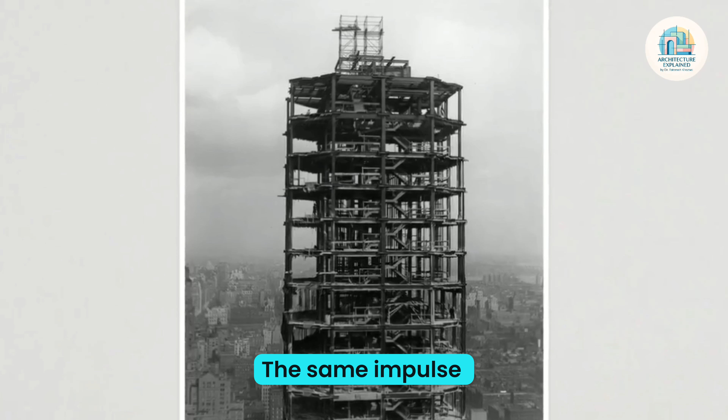Cubism rejected that rigid framework. By fracturing form and collapsing multiple, simultaneous viewpoints onto a single canvas, painters like Picasso proved that the traditional frame was a social construction rather than a physical necessity. This intellectual rejection of the fixed frame in art mirrored a physical crisis brewing in construction. The same impulse to dismantle traditional enclosures was moving from the canvas to the building site.

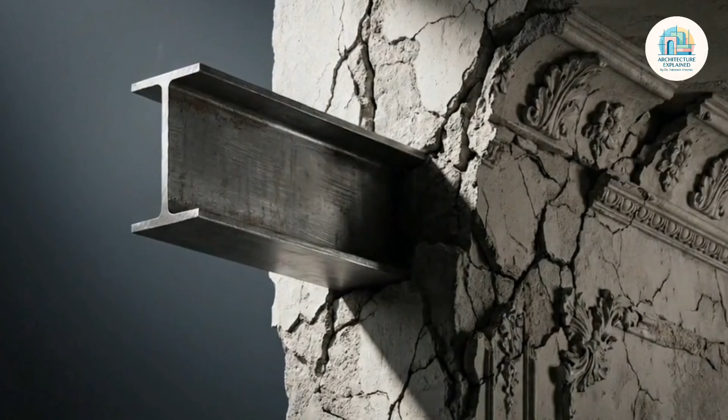The decision to strip away historical ornament wasn't just a change in taste, it was backed by a structural evolution. Architects were moving away from the massive, load-bearing masonry wall in favor of the localized efficiency of the point-load frame. In traditional masonry, height and stability are achieved through sheer mass. For a building to stand, its walls must be thick and continuous to carry the heavy downward compression of the roof. Gravity transfers the crushing weight of the structure directly through the exterior walls.

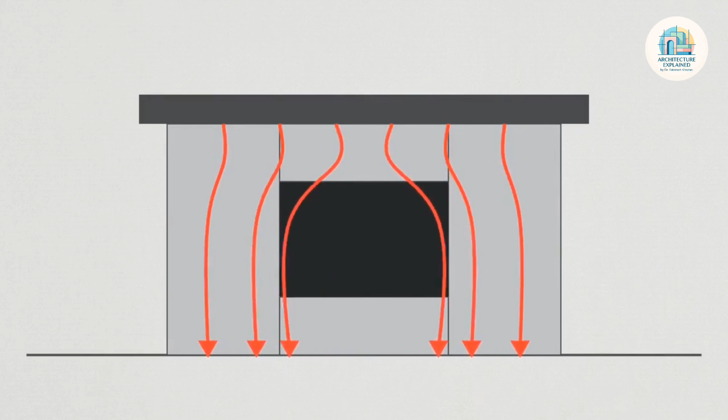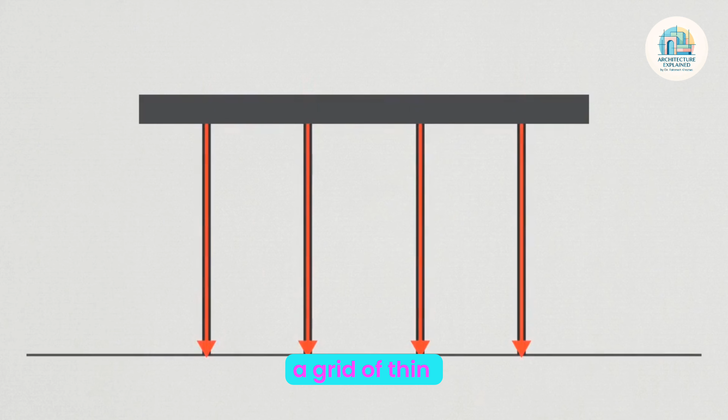Because the wall is the primary support, any attempt to pierce it with large windows creates structural instability, leaving interiors dark and restrictive. This was bypassed by structural steel and reinforced concrete, materials handling immense stress with minimal volume. They allowed architects to isolate weight into a grid of thin columns. The structural skeleton was no longer synonymous with the exterior envelope. By separating the two, architects were no longer forced to design buildings as solid enclosures. They could treat the structure as a skeletal system and the walls as a lightweight, independent skin.

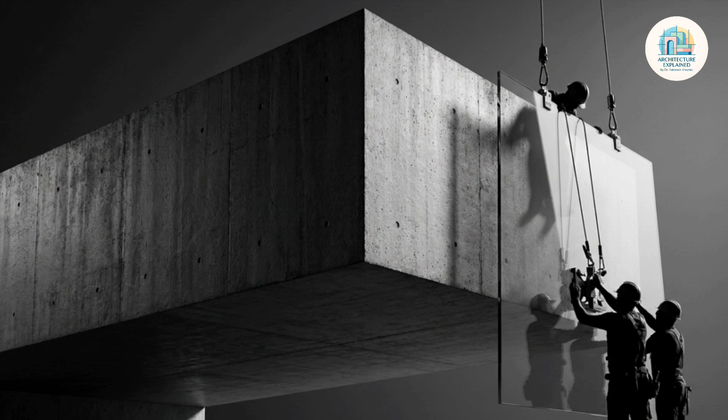Louis Sullivan provided the philosophical grounding for this shift with a single axiom: form follows function. It was a directive to strip away any architectural element that didn't serve a building's specific structural or spatial needs. Le Corbusier formalized this into a rigid system, viewing the house as a machine for living in, and used Villa Savoye to prove architecture could be reduced to 5 distinct structural points. This plan reveals the physics of the concrete frame.

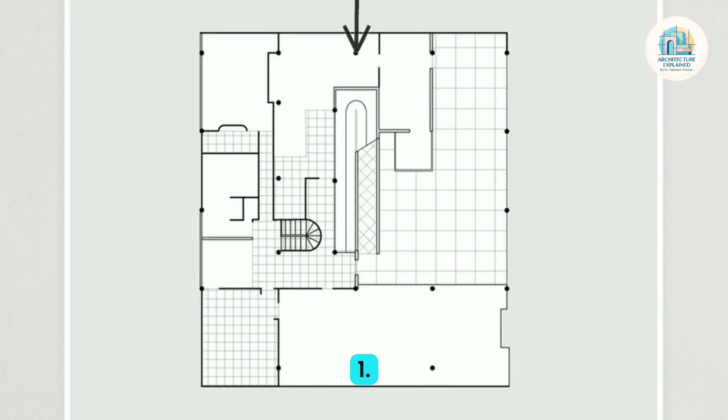Point 1. Pilotis carry the weight, freeing the ground. Point 2. The free plan. Columns handle gravity, allowing non-load-bearing walls to snake fluidly anywhere. Point 3. The free facade becomes a thin, independent, non-structural skin. By solving for gravity through a localized grid, Le Corbusier transformed the building from a fixed carved object into a series of flowing, interconnected voids.

Point 4. The ribbon window. Since the exterior skin doesn't carry weight, architects are able to slice continuous horizontal bands across the entire facade. Unlike small, punched windows of masonry buildings, this ribbon delivers perfectly even daylight and creates a panoramic view, pulling the countryside into every room.

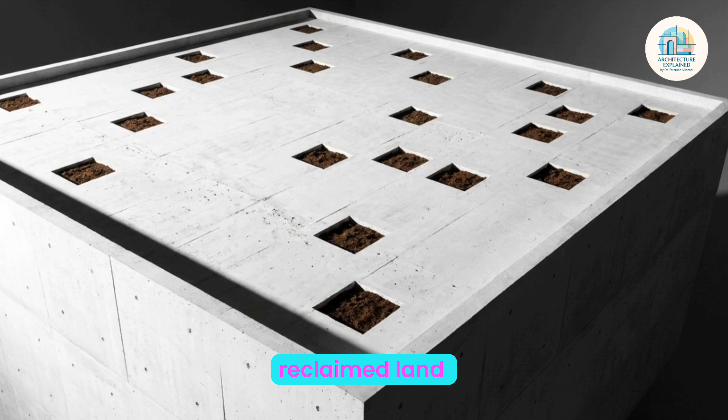Point 5. The roof garden. To reconcile the building with nature, Le Corbusier reclaimed land lost to the footprint by utilizing the flat concrete roof. By turning the roof into a landscaped terrace, the architecture extends the living space into the open air and sky. Collectively, these 5 points achieved Le Corbusier's goal: a highly rational, efficient environment where every spatial decision is driven by purpose rather than ornament.

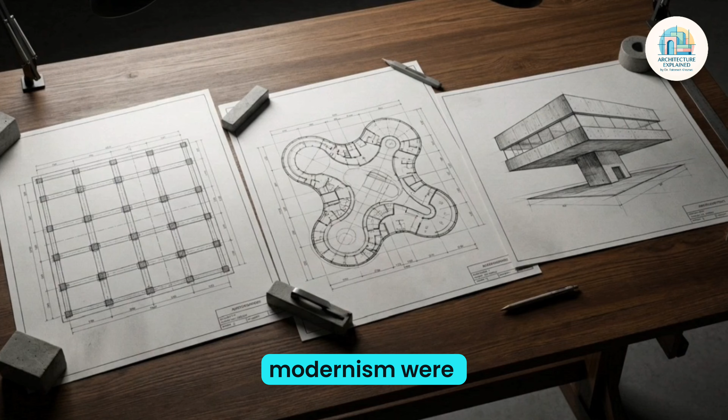While the core principles of modernism were universal, different pioneers applied this structural liberation to reach different philosophical conclusions. Ludwig Mies van der Rohe practiced a more extreme reduction, summarized by the phrase, "less is more." For Mies, beauty was achieved not by adding, but by removing the superfluous. He designed the Farnsworth House as a house reduced to its absolute essence, stripping away even the rational enclosures used by Le Corbusier. The entire structure relies on just 8 exposed steel columns, holding 2 flat slabs.

Because the load is handled entirely by the frame, the walls on all 4 sides are made exclusively of floor-to-ceiling glass. Mies used modern construction to make a moral argument that honesty, structural precision, and total transparency were the highest virtues an architect could achieve.

In America, Frank Lloyd Wright rejected the rigid, machine-like International Style in favor of what he called organic architecture. Wright argued that a building shouldn't hover over the landscape as a foreign object, but should grow from its specific site like a natural formation. Fallingwater, built directly over a waterfall in Pennsylvania, serves as the masterpiece of this ideology. Wright used reinforced concrete to engineer massive horizontal cantilevers that reach out over the water, locking the building directly into the site's natural rock.

By removing the need for rigid structural walls, Wright blurred the boundary between the interior and the forest, making the ambient sound of the rushing stream and the lush view of the canopy functional parts of the living room. He used the tools of industrialization to achieve the opposite of a machine, creating a structure that is inseparable from the specific earth it sits upon.